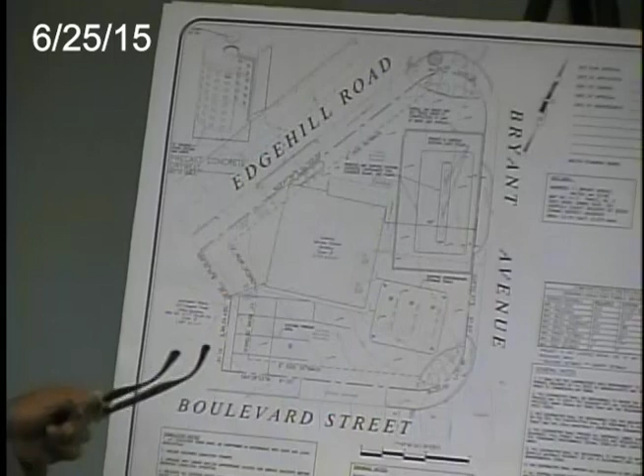One of the concerns was the drainage from the roof, and we did address that in previous emails with the town engineer. What we plan to do is tie the roof drain from the canopy to a drywell structure on site. Basically, that's why we're here.

Great, thank you. Any questions from board members? It's pretty straightforward.

Emily asked Tim, the town engineer—I recall from the report it talked about not just the roof drainage, but also a condition around the pad, so that if there was a spill, it wouldn't go into the storm drain system. One of the best management practices for filling stations is raising up the concrete pad.

This has grooves around it, like you've seen at gas stations, meant to pool gasoline. I also forwarded the Massachusetts Handbook for Stormwater, which explains that stormwater from the site shouldn't wash over that concrete pad, it should go around it.

Same issue with the pipe through the canopy—you don't want stormwater from that canopy washing over the concrete. So that's just a best management practice out there for filling stations.

There's also a reference in the email from John Thompson that there's a new concrete pad here with spill containment grooves. It says it's a good idea, but is it on the drawings? It is.

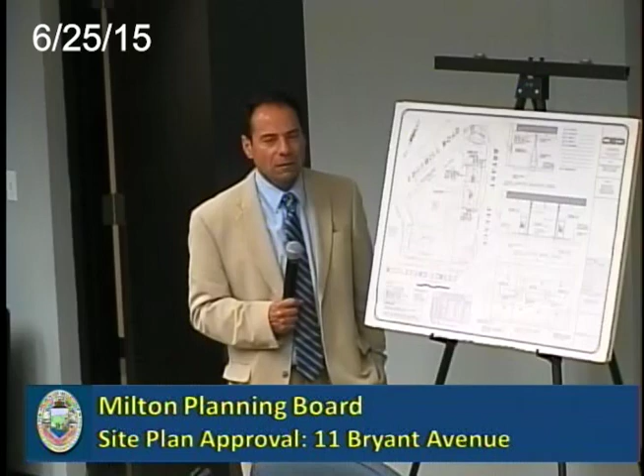And then he raised another question: you're not connecting to the sanitary sewer in any way? No. Okay.

Any other questions? All right, what would you like to do? I'd move to close the public hearing. Okay, second? Second. All in favor? Aye. Okay, we have a motion on the site plan approval, anyone?

And we approve it subject to the selectmen doing their thing? That's subject to sign review? Yeah, yep, subject to sign review, including the lighting strip and a cut sheet of that lighting strip as part of that application.

Okay, and I'd like to also have a condition that the sign lights are turned off when the business closes. Yep, turned off when closed. Any other conditions?

Tim, have you got all of that? Because I'm scribbling down too, so I want to make sure between the two of us.

Brian moved, thank you. This is for postage from... oh, you mean everybody doesn't get one? Yeah, no, this is for postage for the abutters.

Notices. It looks bad for TV, but that's in the rules and regs. It's all legit. Note he received that, everybody knows he received that now.

Condition to shut off lights after business hours. Approval conditioned on sign review from the Board of Selectmen, with the cut sheet and the lighting strip as part of the sign review process. And then it's not just the lights turned off at business close, it's the sign as well. So sign and lights. Anything else?

One of the concerns from the last couple of hearings was whether we could survey and identify trees that can be saved. So they sent out a survey crew last week, identified areas where trees could be saved because they're not within the foundation limits of buildings, the roadway layout, or areas proposed for stormwater detention, and plotted each one: 20-inch oak, maple, pine, deciduous, identifying specifically what the trees are.

You'll see several of them clumped at the front entrance. Along the wall there's not a lot of savable trees, but there are clumps that obviously ought to be saved, within the area called out for open land preservation. Same along the southerly boundary, the Cushing Road boundary — a significant number within the open land area. There are a couple of others, two oaks, outside the open land area but that ought to be saved if possible.

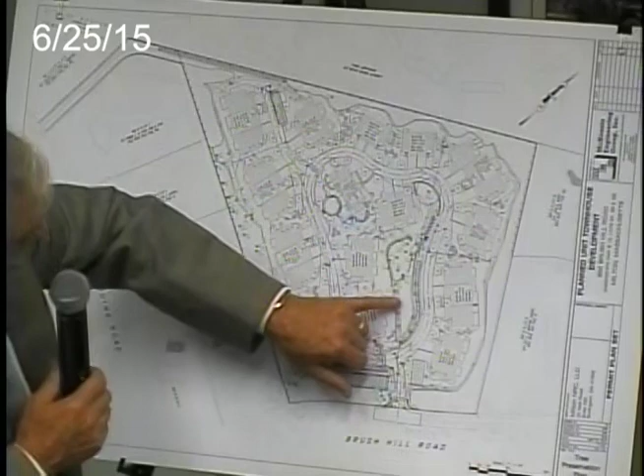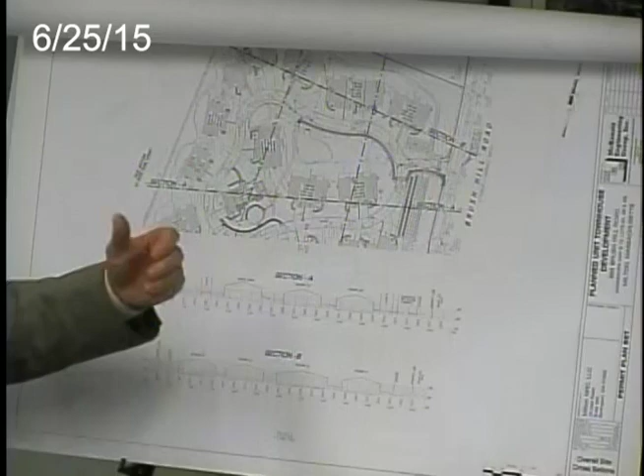In addition, what Deb has done is identify four cross-sections of the property, and I'll hand it to her to talk about what that means and what we're trying to do in terms of all the competing concerns — preservation of trees, drainage, installation of utilities and foundations — to preserve as much green and open space as possible while meeting our zoning intent to develop 36 units of townhouse living.

So with that I'll hand it to Deb, and then we can come back in more detail about our review and comments on the niche engineering report. We have some specific concerns with issues raised, but we believe we have very solid engineering standing to support the positions developed over the last year, and we can get into comments on the other submitted material. So, Deb?

Thank you. I'll go back to the tree preservation plan. As Ned described, Alan Ackerman, the landscape architect, and I walked the site last week and identified areas where we thought there were trees significant enough to look into saving, or coming close to that. I wanted to clarify these are not the only trees — there are trees within the buffer not identified here that we're not touching, and those will be saved as well. We focused more on the internal portion of the site.

As Ned described, going through, there are some trees we're looking to try to save, and some possibly if we can. I wanted to focus on this area we've shown in the past just as a tree line, within the infiltration basin — as you can see, there are many, many, many trees.

6, 8, 10, 12, 15, 16 trees, all ranging between 14 inches, 12 inches to 24 inches to 28 inches. Mostly pines, a couple of oaks, a birch in there, and the intent is to save all of those. So that is a large, nice cluster of existing trees that we're planning to save within the stormwater system.

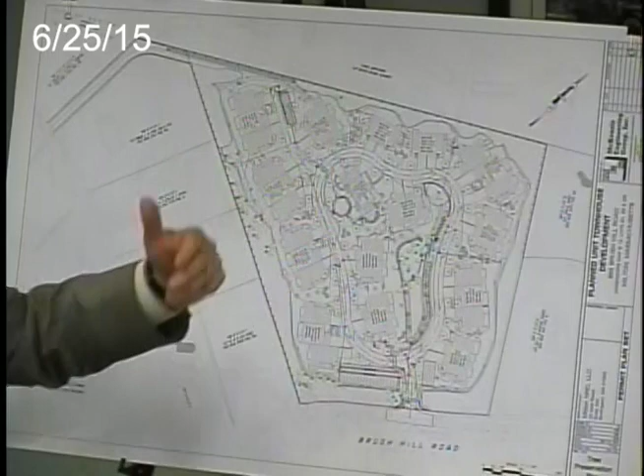The other thing I think is significant is that this cluster of trees in the area of the stormwater detention area is a straight visual shot into the property from the opening at Brush Hill Road. If you're talking about the visual appearance of the site as you're looking in from the exterior, that's going to stand out. It will be a couple hundred feet away, but it will still stand out as an important green element of the project.

Yes. Fantastic. So glad to see we've made some headway here.

I do have, I think, not only the green ones, but the cyan color ones here in the middle that, even if half of them can be saved, that would help significantly too with what you see. And I'd like to understand that head wall, just how that might impact things—is that where you have pipe that's coming over and bringing it to near the beech?

I was wondering if that's going to hurt the beech. There's a natural depression in this area, so we're adding relief to make sure that we're not flooding anywhere along the property lines. In this case, that's what that head wall is doing—providing that relief.

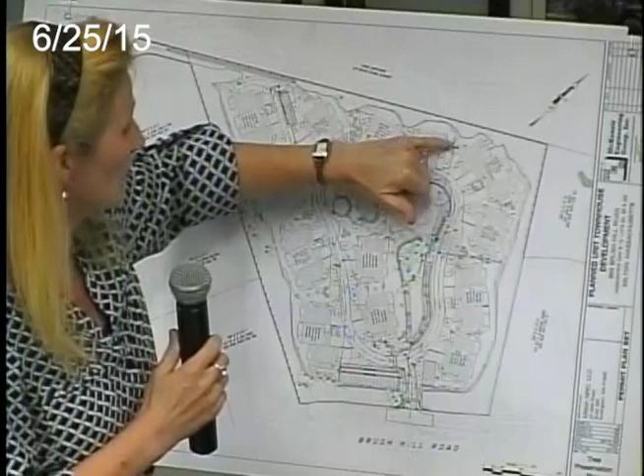And I think, I'm almost thinking that we don't even need to move the head wall because it's fill. So what we can do maybe is just alter some of that fill on that side so it wraps around that tree trunk, and we won't be impacting that tree at all.

If we think we're getting too close and might impact the root system, we'll pull it back. That tree is obviously used to that location, so if it's wet, it's accustomed to that. But will you be bringing more water then to the beech?

There'd probably be more flow coming here, but we're also cutting off some of the flow that originally went there. That's the natural flow pattern, coming in this direction towards Brush Hill on the site. So it's not going to pond near the beech—it'll continue flowing down into the infiltration basin area.

Okay, then lastly, Emily. So are you confident with the regrading that these trees are not going to get too much new soil at their root ball? With the green ones, yes.

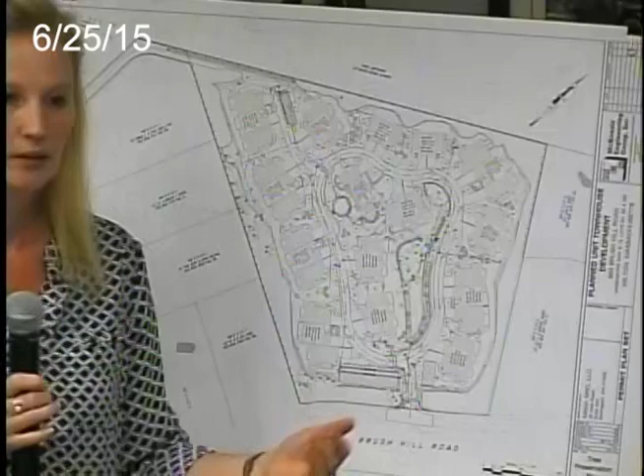I think, again, with the cyan and magenta ones, until we get out there and really work around it, that's when we can see whether a tree well will work, or tweaking some things during construction, whether those could be saved. So the green are a definite save, cyan and magenta are do-your-best. Yes, effectively, that's the plan.

This follows an experience base that we employed as a result of a similar conversation in Belmont about 10 years ago, an approval process to develop a tree preservation and protection plan. We titled it a set of drawings followed by a narrative. It essentially created—Alan and I were the authors of that—a hierarchy of must-save trees, what you've heard me call character-defining trees.

Must-saves, which can't be removed unless we come back to the planning board with a good argument. We try to save if possible, and then we employ what we developed around that: a protocol of fencing at the drip line and fencing of the trunks so that scarring wouldn't occur, and a root feeding protocol if necessary. We employed that as we actually built out the project and embedded that tree preservation concept in all of our subcontractor contracts and in the master deed of the condominium.

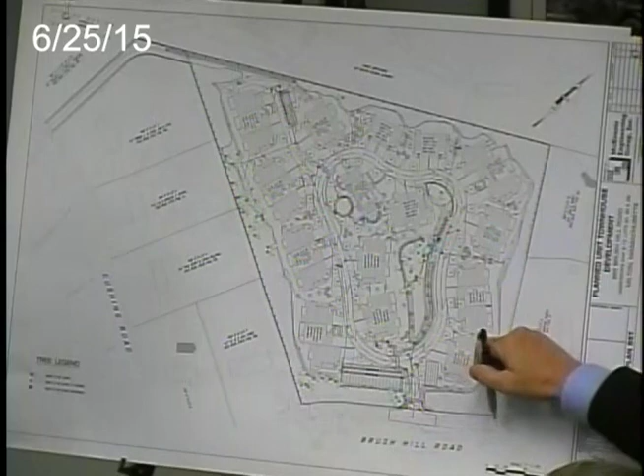Right. Exactly. So you have to give a lot more than say it's 40 feet off the property line. You'd have to say specifically, if this is the bound that makes the corner, you go out 62 feet, you turn an angle of 80 degrees, and then you go 40 feet. But that's the information that he keeps saying, why don't we have it?

With respect to that, if I put a specific coordinate on that plan today, and I have to move that coordinate by a foot, I gotta come back. Shouldn't have to come back to deal with a construction detail. Unless the permit says you don't have to come back. Yeah, we'll give you a foot, we'll give you 2 feet.

All I ask for is a written description of more or less what you said, with a little more oomph behind it. But you're looking for a narrative. What I heard you ask for initially was a metes and bounds description of every one of those spots. And then you came back and said, that's not how we do it. And then I said, well, how about giving me a written description about how you do it?

And I apologize, we didn't hear you saying that. I'm suggesting that again. Okay, I'm sorry.

We can do that. We can do that. In all due respect, you know, in 30 years and 1,000 units worth of permits and approvals, I've never given a latitude longitude for each corner of the building at this stage, when we go to build. And we're not asking you to do that.

Goes out into the curb? So it'll go into this low area here, which continues draining down this swale and underneath the cross culvert. I don't understand - this is at 104.45, the topo line here is at 110, 109. Is it going uphill? No, this drops down. This is when the road is high, the beech is low. Near the beech is 104, 104.1, so that's where that invert is.

You can't see the spot shots, unfortunately, on the half size. That's 110 - nope, that's 105. Oh, I'm sorry, easier followed that way. See the retaining wall - this one? Yeah, sure, got this big one - retaining wall here holds that 110 back, and so then this is a walkout scenario where you have a 106, a 105.

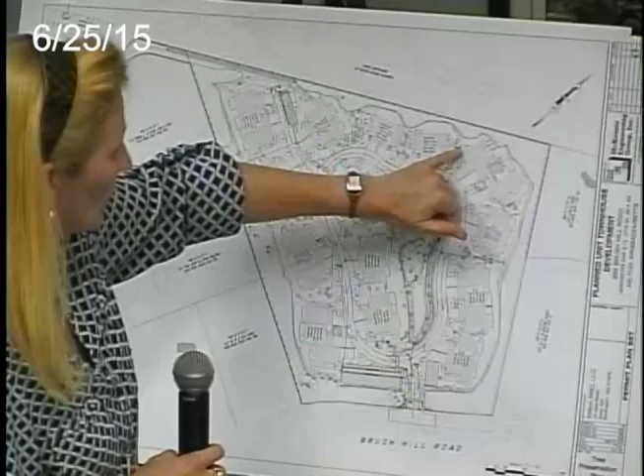It dumps out on the beach side of the retaining wall? Correct, and this is lower than the 104.45. Not much, you're right. So you don't have much pitch there. It is quite flat, yes.

So you're still probably going to end up with some ponding outside. You will, because that is a natural depression. So I'm not fully draining that area because it acts as a natural depression, and I'm keeping it as a natural depression, and it'll be 104 when you're done here, right here. Yes, so you'll have about a half a foot of ponding there before it reaches that head wall. And then if this is flat...

Yeah, it won't help it much. I mean, it'll probably pond more than a half a foot, because even when it gets to the invert, it'll just even out at some point, it'll just keep coming up. We can, like you said, that existing tree is at the 105 contour. We can maybe slide that head wall over a little bit and try to maintain that 105, wrap it around that tree, and change that channel direction. I mean, obviously I made it a straight line - you can curve around. You know what I'm saying though?

Yeah. If I exaggerate slightly and say that the pipe has no pitch, then if it starts ponding at 104, it comes up to 105, it's gonna keep ponding because it ain't going nowhere, it's just sitting in the pipe. Well, the downstream side doesn't pond up that high, so there'll always be a free discharge. Yeah, I'm just talking about the ponding back here. Right, well it'll have the discharge at the 104.45.

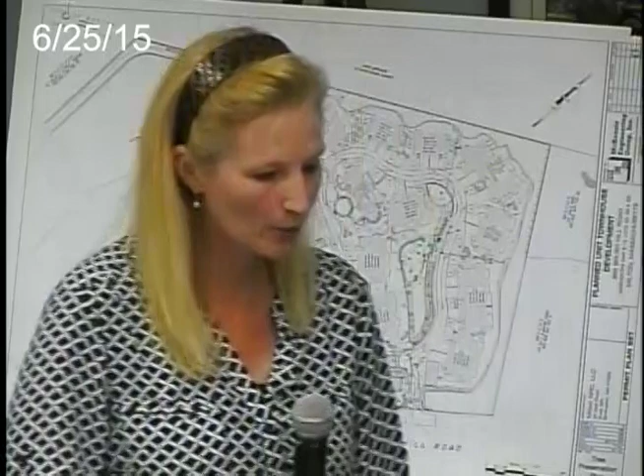So yes, you're right, it ponds up to that point and it is allowed to infiltrate in that area naturally. If the pipe is level, it's gonna continue because it's gonna fill the pipe up, come back and keep them up. But it's not level - it's just shy of a 0.5% slope on the pipe. So what's the invert grade where it drops out at the downstream side? 104.1, so the pitch in that pipe is just shy of a 0.5% slope - the invert's 104.1, and the other side is 104.45. Yes.

Maybe if you go through the site cuts too, you can explain how all of these are on the next pages - 2 pages.

Starting with Plan 6A, what I did was, per the request, look at some of the cut and fill that's on the site overall. I cut 4 sections - Section A, B, C and D, which are on the next page. A and B run in a west to east direction, so from the City of Boston property line towards Brush Hill Road. The sections are in a 1-to-1 scale, so they're not exaggerated like our road profiles typically are.

I know, and this is why I gave you kind of a bigger plan. It's nicer to see this all in one plan rather than cut up, and then the profiles end up being a little bit tighter when you do 1-to-1. But I think it'll show you where we're matching, where we're matching.

The green line is the proposed surface elevation, the red is the existing. As you run through Section A, we're starting at City of Boston, we're matching at the tree line, we're coming up to Road B here, which is consistent with the Dupee House, which is our fixed high point on the site. And then as we run down, we're cutting through buildings 13, 12 before we hit Road A again.

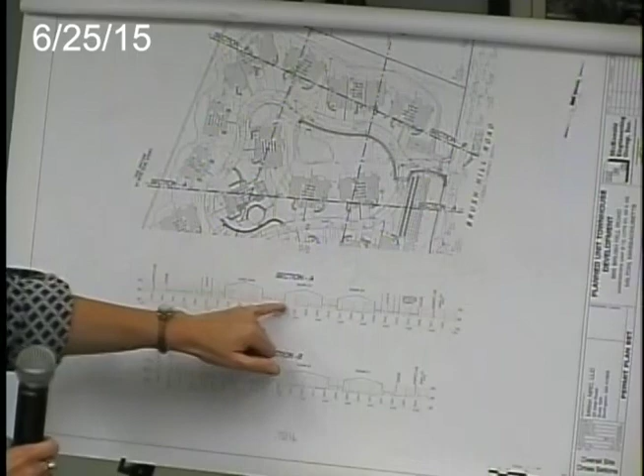The Dupee House is the high point, so if you travel along the road, we're at a 1% slope to get down to the low point, so I can't flatten that out anymore from a road design standpoint. So those 2 buildings, buildings 13 and 12, follow the road pitch, so they're a little higher in the front, which is where you'd have the fill - you can see that in between the buildings. And in the back, we're anticipating keeping this area, which is near the infiltration basin, lower and at grade.

You'll see that a little bit clearer in one of the south to north cross sections. And then as we meet Road B again, we're starting to match existing grade, and this is in the low section or entrance of the site. So again, we're coming to match grade.

Again, we can go through Section B, doing the same thing, starting at the City of Boston, coming through buildings 4, 3, 2, and 1. We're matching grade, working through, following. Building 4 is at a high point in the site, and the site actually drops down a little deeper at the location of Building 1, which is where we have the most fill on the site as we turn to the Brush Hill entrance.

When we move to the next sheet, 6B, I'm cutting the sections from west to east, coming from the Cushing Road property, abutting properties towards the Dana Ave side. Doing the same thing, Section C starts cutting through Building 9, through the Dupee House again, 14, and Building 3.

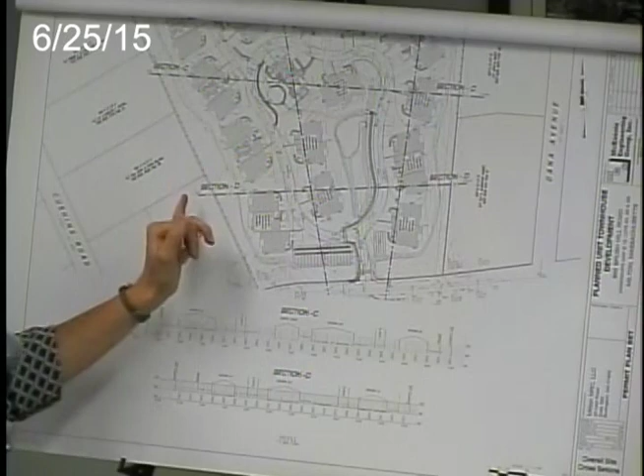Going through Section D, again starting on the westerly side, clipping Building 11, 12, the infiltration basin, and back into Building 2 towards Dana Ave. Here you can see where we're matching grade or even cutting grade slightly in the infiltration basin, but the back of Building 12 is basically, I think, a foot off existing grade, and we're trying to meet that, then coming back in and meeting grade again towards the easterly property line.

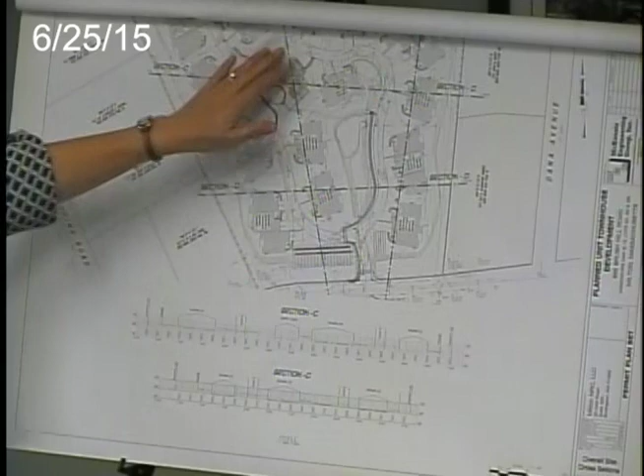Mainly, this shows that most of the fill is associated with the road, and once that's required, you're tying into the buildings, so you want the flow from the building to come towards the road. So the front of the buildings are linked to the roadway, and we're working with the backs of the houses to match, providing walkouts where we can, or half walkouts, so that we minimize the fill on the site.

Questions? So, tying this all together with the trees, if I'm looking at Section D at Building 12, to the right of Road B, is that about 3 feet of fill in there? Yes. So to try and preserve the trees, you would try to hold some grade back with a tree well?

Unfortunately, Alan's not here to describe that in further detail, but he'd be the guy.

I'd be curious to hear, did you do that in Belmont too? Do you find success with that so far? Yeah, we were good. I'll be honest with you, the success that we didn't have was with homeowners, where the trees were too close to a house and dropping leaves and branches on their decks and or gutters. So our issue was not with the physical environment, it was with the people environment.

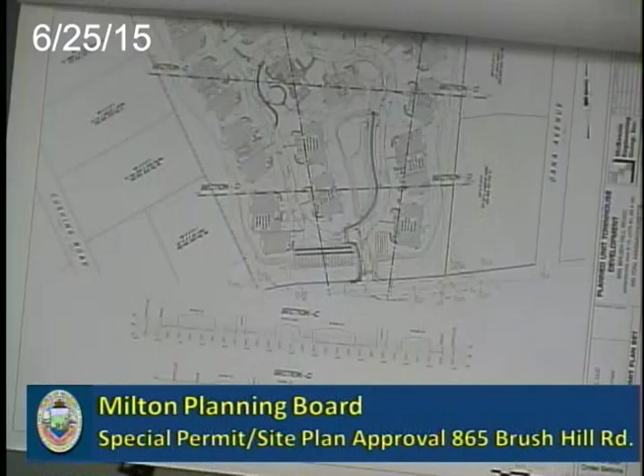Sure, absolutely. That area, as described, is one of the low-lying areas around the site. As we discussed, I believe, at the last hearing, there's sort of a high point midway down that property line. So there's flow that flows into that low point, and then the southern portion flows towards the Brush Hill side of the site. So looking at this area, we're filling some of the low-lying area on our site.

So we wanted to make sure that what we have left for a depression in the rear of the buildings would accommodate the off-site runoff that comes onto the site, and also make sure that we don't increase that area. That would be the reason for the relief pipe on our property, which ties any flow going into that into the site's drainage system.

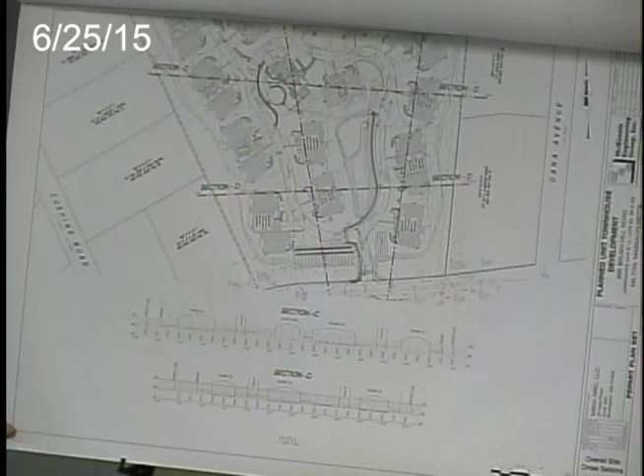And you anticipate that during an average rainfall, you'd have water moving into that pipe? I don't, on the lower storm events. Typically we look at the 2-year, 10-year, 25-year, and 100-year storms. I believe we do have flow in the larger storm events coming through that pipe, but not in the lower storm events.

So ponding happens in those areas during rain events and slowly infiltrates into the ground. That's the process we're keeping, but giving it relief so that we make sure we don't increase any stormwater along the property lines.

Okay, so it looks like in section C you're actually cutting in a little swale or retention area, right? Yes, to make sure that from this natural high point, we're not directing water onto the abutting properties, but towards that depression. So we're creating a small swale there to make sure we get it into that one area so we can utilize the relief as well.

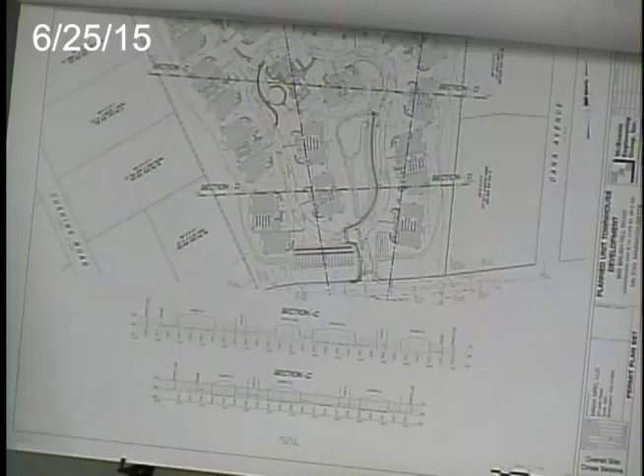Thanks. Any other questions? Mike, your green line on your section shows the base of what Cheryl describes as a swale at about 102 and some fraction.

When you mean from an elevation standpoint? Yeah. During that cross-section, it's actually elevation 106. It doesn't show it as that, it shows 102 and some fraction. Well, each one of those lines is a value of 4 feet. I didn't want to have all the individual lines shown, you wouldn't be able to read the cross-section. I got you, okay.

Anything else, Mike, on that? Yeah, you say you're going to bring on 13,500 cubic yards. How many cubic yards of excavated material are you going to take off the site? The goal is not to take anything that's not needed. So when we looked at that evaluation, we took the topsoil, stripped it, and stockpiled it. We'll utilize that for loam on the lawns, etc., on the property, and the need to bring in that much fill to accommodate the development is needed.

Most of the foundation excavation could be reused, that's the goal. Under the roadway, we would have to amend that material depending on its condition. But the roadway's material is actually going to be built first, so you wouldn't be using it as backfill. Not on the roadway. You said most of the backfill area was the roadway.

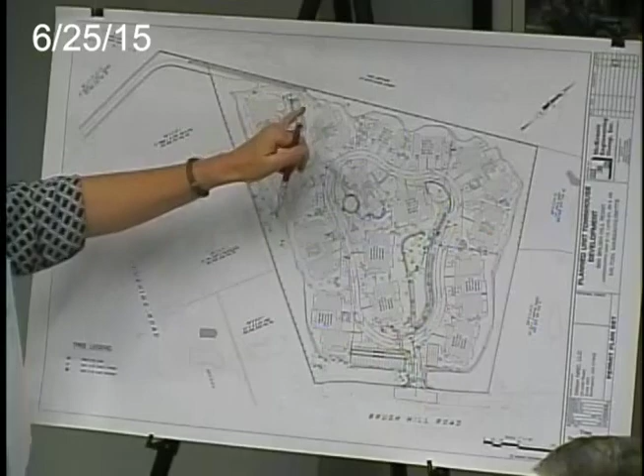Now with the construction of Building 8, we're redirecting it towards Design Point 4, which is along the Boston housing property. This trench will accommodate the lower storm events—actually it accommodates up to the 100-year storm, so we don't have any discharge going in that direction. I believe that design point is acceptable and accommodates the design development, and we can add it. I think they asked us to add it into the narrative, which can be added.

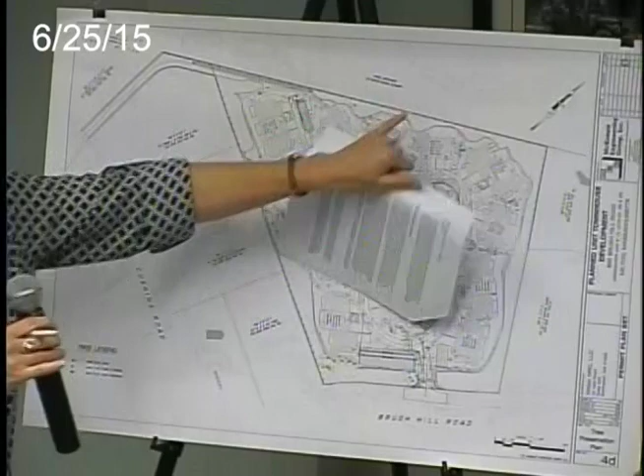Secondly, they are asking about design points 3 and 4. Design point 3 is this low-lying area, and 4 is along the city of Boston property line. They're questioning whether, even though we've complied with the requirement of no net impact in those stormwater areas, we know those areas pond water during storm events and we're allowing that to still happen. A lot of the subcatchment to those areas is off-site as well as from our site, so we're maintaining those existing conditions.

I tend to disagree, and I'd defer on whether we need drainage easements on those abutting properties for those areas, since it's an existing condition at this time. If they alter the abutting property or fill that area, it's going to impact this site, but we're not going to be impacting their property.

Would that be a reason to have an easement in place to protect your own interests in the future? No, I don't think so.

And then item 3, I think it was an omission on our part not to provide a detail of the riprap apron, so that you have the minimum stone size and dimensions for the apron that's proposed.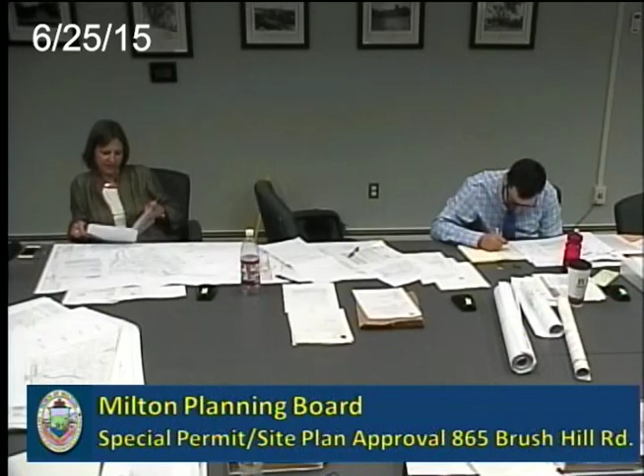So the one item that you suggest you'll modify the design is in Nitsch's letter, under compliance, item 1B, right? Yes. And then there are a couple places that you're going to add to the narrative or to the report, right? Yes, we can further describe the design, and you have a couple of disagreements with them, and then a couple of explanations. We'll get that information back to Nitsch.

We'll get the additional information back to Nitsch. Okay, I think Nitsch had put in that we expect a revised set of plans will be submitted, so we'll just pass it. They said they have additional comments, but I think we're waiting to see some of the information that comes back, which may either eliminate or expand their comments. We provided a written response to this that went to Bill, but Bill probably hasn't seen it on his email yet since it was late in the afternoon. This response here?

Yeah, it was 2 o'clock? Yeah, for Nitsch, some of the things in here, you said you're gonna do some redesign, so you would feed that information to Nitsch.

Bill, I assume our standard practice is if there's a response, we feed it back to the original peer reviewers so they can see the response. Nitsch is gonna want more than just this narrative. We will provide the responses as we've indicated. I think at the end of the day, if there's a disagreement, I'm going to ask the board to defer to the judgment of the person who spent a year designing the site.

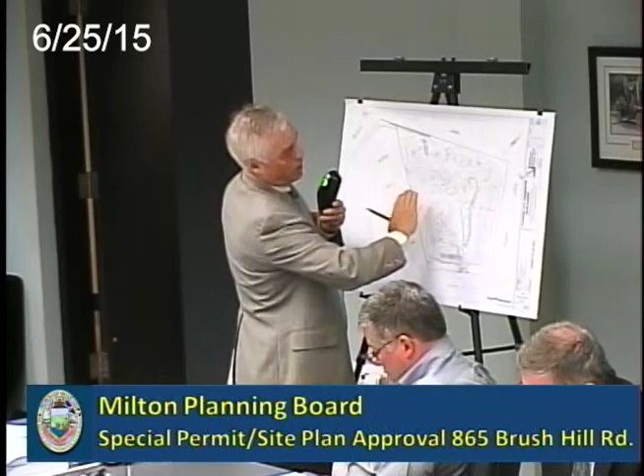Jim DeSalle actually put the property under agreement, and he hired me to take them back through it. There is a slope, and he and his partner Jim Burke designed - the first time I ever heard the term Cultec - a Cultec system to hold stormwater at the low point of that property. All of those properties dip down in the back, and there's a natural swale that goes down behind Sam Perkins's house, and water drains generally in that direction as it heads to the low point at the low side of Bradley Road before you come back up to Blue Hill Avenue.

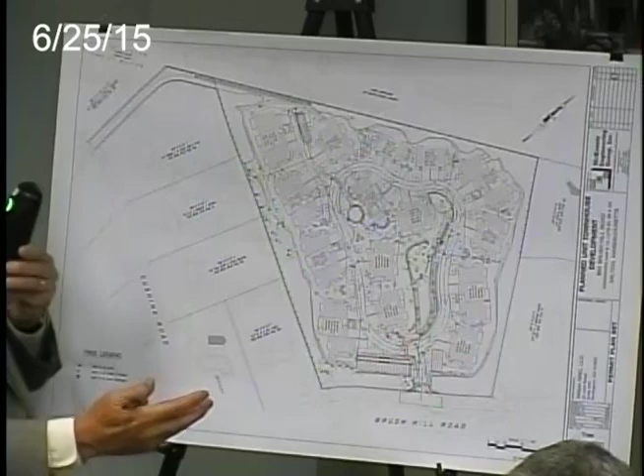So a condition of the permit granted by the Board of Appeals - because they looked at this as if it were a subdivision of property with 3 lots, and the third lot had more than 32,000 square feet but fewer than 40,000 square feet, they actually have the ability to issue a permit to develop that lot. So they found that the intent was to allow a 40,000 square foot buildable lot. They found that the property complied with that catch-all section of zoning, which would have allowed a special permit, and they granted the permit on a condition that they install this drain system.

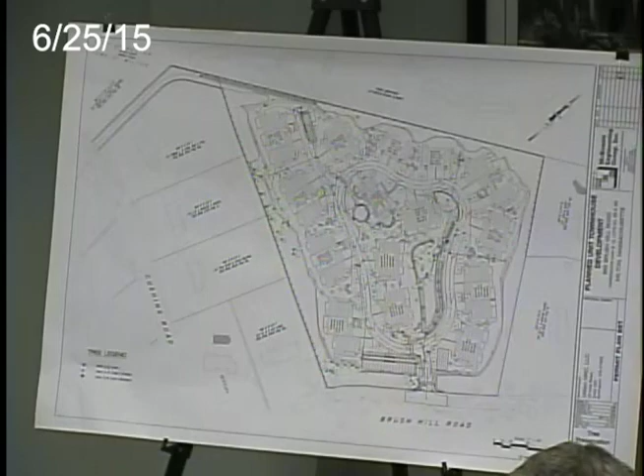I have no idea what he's talking about with respect to drainage and other issues. It was properly installed, the house is built, there's someone living there. I haven't heard from other neighbors that there are issues and concerns, but it was properly permitted, properly designed, properly constructed, and in any event has no bearing of any kind on this project. It's a completely different property, completely unrelated, a completely different approach and a different set of facts. I just thought it would be helpful to the board to understand the background because I was involved in that project, but it's completely different.

Thank you. Okay, so I think where we are is next steps. Now, we had a request at our last meeting from Mr. Corcoran to close the public hearing tonight. Obviously, we would need to continue our deliberations - his request was July 9th. We'll talk about schedule in a minute. But how does the board feel about closing the public hearing at this time?